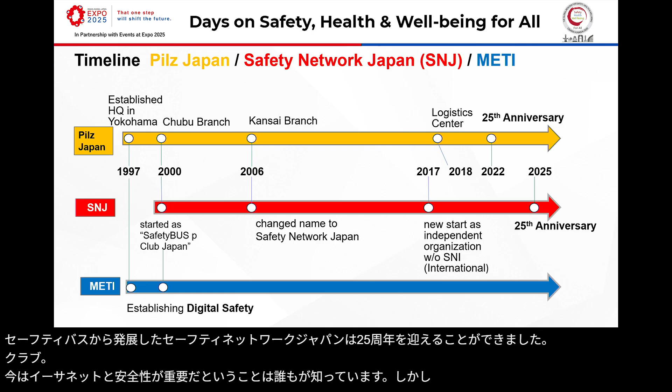Now, safety is at home in every industry. The most interesting industry, however, not so much in Europe but with success here in Japan, is hydrogen as a means of powering vehicles in competition with battery electric vehicles. The promise of hydrogen is that you can use renewable energy sources like solar, wind, or water to store energy, so that when the grid doesn't need the sun that's shining or the wind that's blowing, you can store the electricity.

Rather than shutting off the windmill from the grid, you can then use the storage to either fuel a vehicle or create energy by replacing gas power stations with hydrogen-based power stations, giving your house warmth when it needs it. Right now, we see the industry scaling up, and the key to success of this industry is modularization. For modularization, you do need standardization.

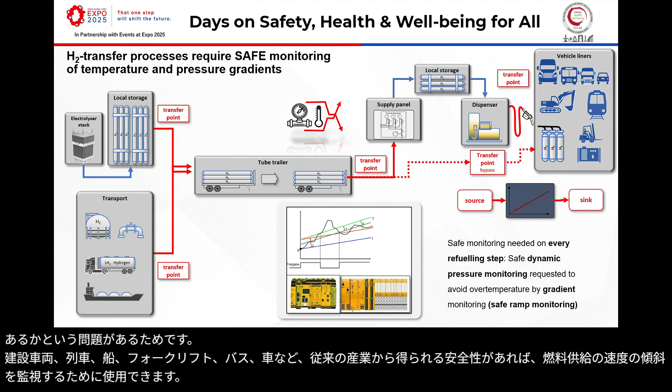For efficiency, you need safety, because the question is how long does a vehicle have to stay at the dispenser when you need to refuel it, whether it's a construction vehicle, a train, a ship, a forklift truck, a bus, or a car. Only with safety that you take from traditional industry, like the ramp of a drive, can you monitor the ramp of the speed of fueling. This way you can shorten the time to have it filled up.

The next challenge is that a trailer is an investment of around €1 million. If you have invested in a trailer, you cannot necessarily expect to have the right connections at the filling station, so sometimes they have to send the trailer away because they cannot connect. Sometimes the driver of the truck doesn't know which panel to connect to. Safety technology can help give safe access so that you don't make a mistake when you pump the hydrogen from the trailer over to the station.

The same technology you can use to provide not only the safety of the process of making hydrogen, you can also securely monitor the access. That is a physical security measure, including a two-factor authorization methodology by which you can have remote maintenance without the danger of pirates trying to capture critical infrastructure.

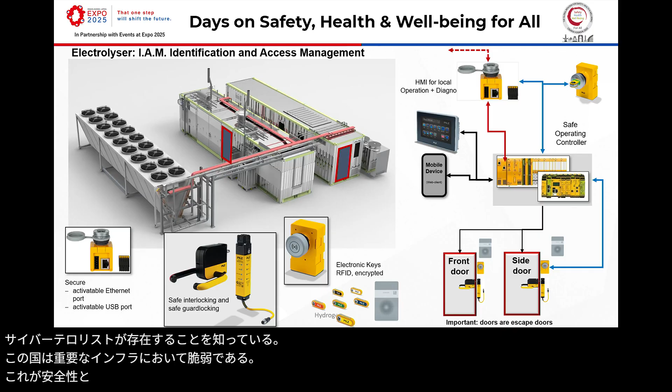Because in the day of the World Wide Web, it was earlier seen as a community of people with well-thinking. Today we know that there are cyber terrorists, and every country is vulnerable in the critical infrastructure. This is why safety and security technology can help protect a country's well-being.

Now, how do you combine the basic needs of safety and security with industry? We feel that it is a good decision that in Japan, well-being is in the center of everything. Well-being while at home, well-being while at work. What does protect well-being for us? It is feeling safe. Now, what makes me happy and safe when I'm at my workplace?

It's the technology. Because if I am in a workplace where the technology allows me to collaborate with a very fast-moving machine without me having to be afraid that I get injured, I feel well.

But safety changes. It used to be very static. You put a robot in a cage, and then there is safety. Today, you want to shake hands, not literally with a robot, but you want to share the workplace. And our esteemed colleagues will present you later how that can be done.

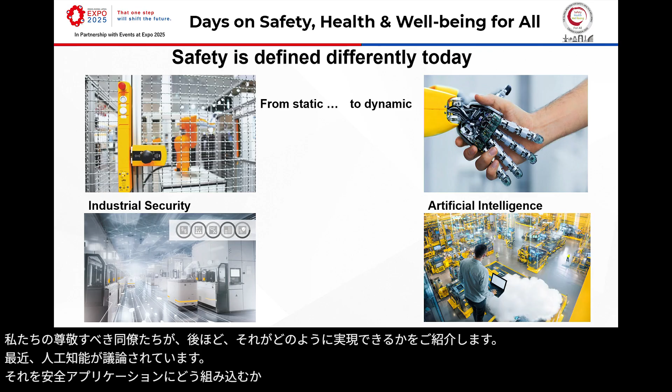Lately, artificial intelligence has a lot been discussed. How can that be included in safety applications, as well as industrial security?

In Europe, the regulators have seen this, as well as the standard writers. We are standing in front of a big change because the machine directive was not law. The associated industrial standards were not law. So nobody could sue a company that was not interested in bringing proper safety in until an accident happened. Then the BG comes and then you're in trouble.

This all changes in 2027. Then by EU regulation, you violate the law if you don't provide a safe and secure workplace, when you don't care for the well-being of your employees. What is regulated now is cyber resilience in the Cyber Resilience Act, the need to protect safety separately so that a cyber criminal cannot take over the safety function of an autonomous machine.

A lot of the scenarios are around autonomous machines going haywire because they have been corrupted by cyber terrorists and they go and run into people, killing people. With proper safety technology, this is a fiction for Hollywood movies, not for reality, because safety makes sure that you come to a safe state. This again means that you need to protect the security, that you can't eliminate safety.

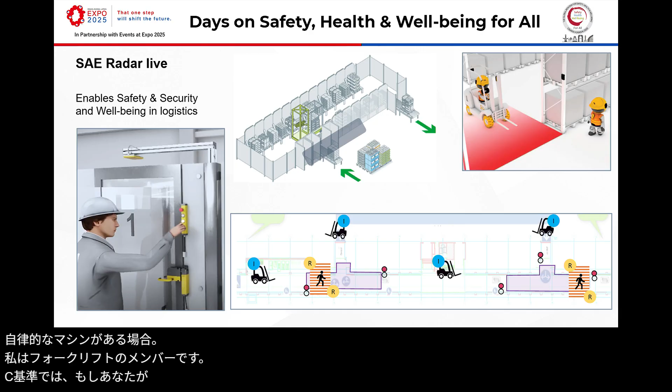Also, you have the ability to regulate access in such an area when you have autonomous machines. I'm a member of the forklift truck standards committee, and there we say if you close off the area where the autonomous forklifts drive, you don't need safety devices on it.

But you need guarding when you enter it. So when you have such a zone, you could use radar technology to count and detect people, or RFID reader technology to inform how many people have put the whole area into maintenance mode, and ensure they close the door behind them, because the safety system cannot be restarted until the last key has been taken out of the electronic lockout tagout pack.

You still have the problem that when you have people in such an area, you want to have productivity. If you can track where the human is, you can allow full speed where the autonomous vehicle is, as long as you know the distance is far enough so that no harm can happen.

This, to me, is especially true in the country of robotics. Whenever I want to follow leading robotics, I read what's happening in Japan. You're definitely the leaders in this technology, and I hope that safety can present continuous well-being at robot applications.

Where security on board ensures that the AGV cannot be hacked, and where conventional safety technologies merge with artificial intelligence and modern ways of collaboration, as will be presented later, enabling us higher productivity with well-being at the center of the collaboration between a robot and a human.

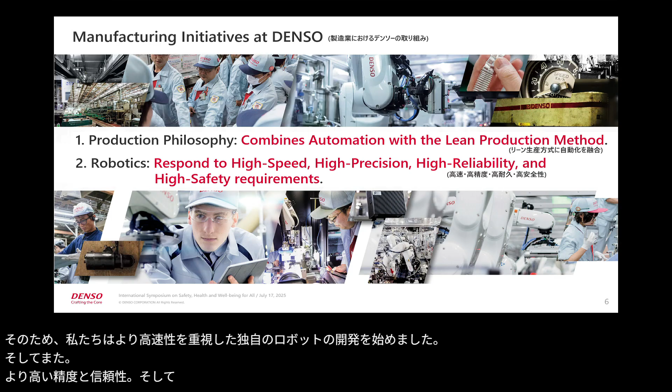To rationalize the current system, in Japanese we say we do Kaizen first, then automate afterward. After rationalizing through Kaizen, we developed the automation, so we can realize a more lean automated process.

After that, of course, continuous improvement is the key to improving productivity. This circular system starts from investigating the system and Kaizen, then automate and Kaizen again. This loop is the most important key in our operation. So this is the lean automation concept.

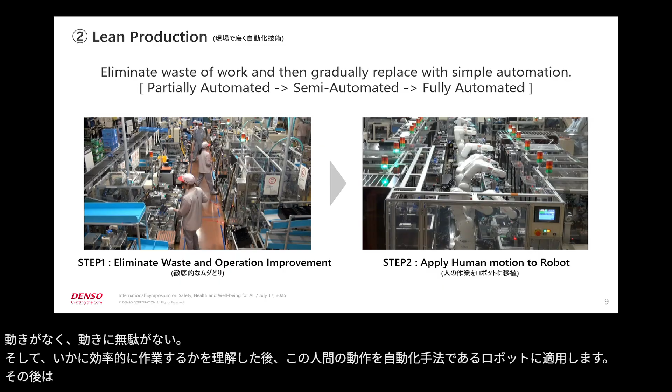So after that, you can see a very high efficiency automation system. After automating, the Kaizen activity is quite important, as I said.

Now we are currently using the IoT system to visualize the muda and the loss of machine operation. But it's not just about finding the waste, we need to attack it immediately at the Gemba side. One team, all together, is one of the key things.

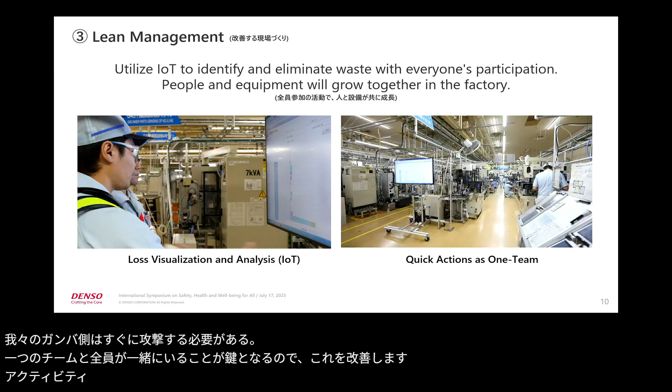In Japanese, this is called 'everyone participates in Kaizen.' This activity is also very important to continuously improve our processes.

Anyway, to realize that system, we have been developing our robot system from the very early stages. Historically, we developed a more high accuracy robot, such as the sealing system you can see here. This was developed in 1988. Before I joined Denso, when I saw this video, I was very impressed.

After that, we developed our business, such as the Denso Wave robot company. Now we are focusing on adding more safety functions to the robot. You can see this is our latest collaborative robot, which can work at very high speed. The key was the actuator controlling system.

I'd like to talk about the future production system. Denso was historically focusing on the area of certainty in production volume and product life cycle. If you developed your component or product, this area would give more cost efficiency. But recently the system needs to respond to more flexible manufacturing, so we need to develop this area also.

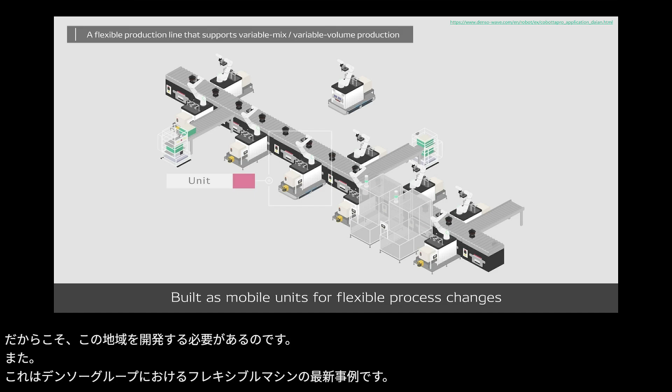This is the latest example, an actual flexible machines example in our Denso group. This is the concept: you can see the conveyor system, transfer system, and each robot module can connect anywhere they want to make a more flexible system. Many collaborative robots can move and join the transfer system, and we can produce many varieties of products—no limitation of the product.

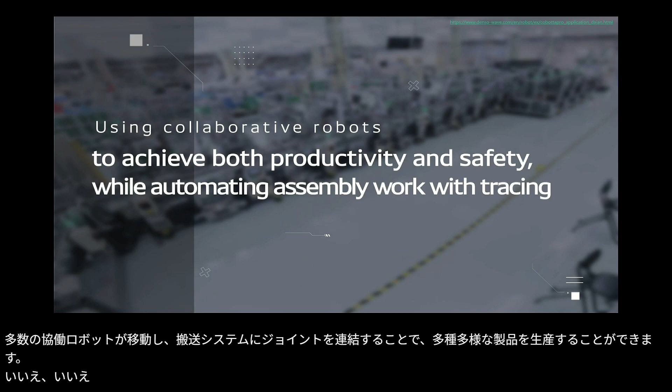To realize this system, safety is key. If maintenance people come to the machine side, the machine will autonomously slow down. We are using this type of sensor system to detect the human. After finishing maintenance, the robot can move faster again. You can see the person here on the left side, and also after finishing maintenance. This is the latest system.

To realize that type of system, the key is risk assessment. This is one example in our company: when you install a collaborative robot, it takes 40, 50, or more hours to complete the risk assessment of the total system. You probably know the ISO standard well—this activity involves determination of the limits of the machinery, hazard identification, risk estimation, and risk evaluation. Such a loop is needed, but this process is very complicated and difficult to do with just a robot engineer.

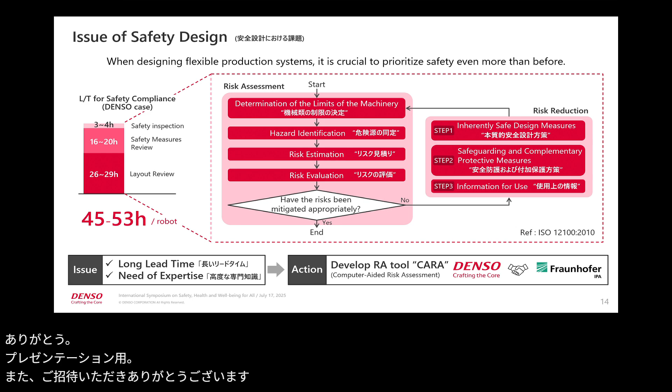Thank you, Yoko-san, for the presentation, and thank you for the invitation. My name is Werner Kraus. I'm with Fraunhofer IPA, in almost the same city as Thomas Pilz in Stuttgart, in the area of Mercedes and Porsche in Germany. At Fraunhofer IPA we've been in robotics since 1973—more than 50 years pushing the automation border. I'm responsible for the automation and robotics division at IPA, with around 70 people working on all kinds of industrial automation. Denso has been a long-term partner of ours for almost 10 years.

We are cooperating especially in the area of robot safety, because it's really an important topic today. What we have learned, and have also seen in the Denso presentation, like the sealing application, is that we have already seen incredible automation solutions in the past, 20 or 30 years ago, automating processes we thought impossible because they were flexible with complex work pieces. Looking at our history, we see we're still doing the same processes—handling tasks, assembly, welding, gluing—so we've said we are now talking about the automation of automation.

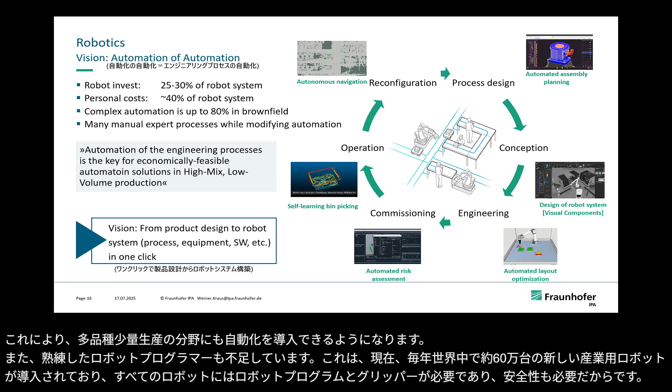So we are now automating all the processes around the robot system—for example, process design, conception of the robot system, engineering, the layout of the robot cell, and especially risk assessment, which is the focus today, but also self-learning bin picking and autonomous navigation. This gives us the possibility to introduce automation in areas with high mix, low volume production, and scarcity of skilled robot programmers. Every year we introduce around 600,000 new industrial robots worldwide, and every robot needs a program, needs a gripper, but also needs to be safe. That's the point where we started with our CARA.

One of the enabling technologies is the so-called matrix production—a production concept derived from Industry 4.0 which allows for personalized products. We have positions in the loop that are completely manual, but also fully automated stations with highly optimized robot solutions. This combination allows us to combine the strengths of humans and robots, together with autonomous mobile robots, which enable the material flow.

We have seen that safety is a really important topic, and it's not just nice to have, it's mandatory, and it's often underestimated from a cost side. Around 10 to 15% of a complete robot system is invested into all the safety-related components and engineering efforts. When we look at the worldwide robot market, it's currently around 17 billion US dollars, that's the industrial robot market.

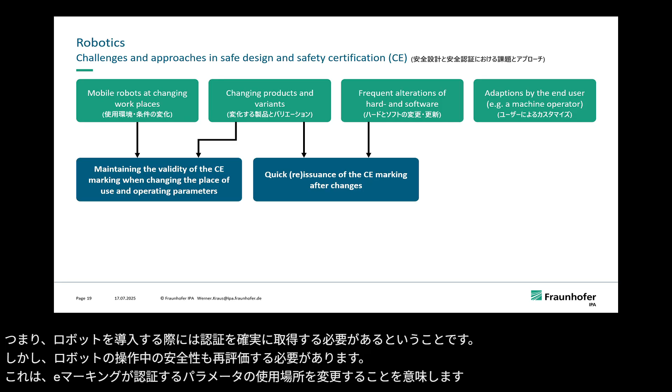This means we have to ensure the CE certification when the robot is deployed, but we also have to re-evaluate the safety during operation of the robot. This means CE marking when we change the place of use or the parameters. We should re-certificate the robot after making changes, for example changing the workpiece.

But then we have to also support the engineers in performing the risk assessment. This means we have to incorporate the safety standards, like using inherent safe design, for example checking the machine borders, but also adapt the safety configuration, for example in the PLC in the end. And then also support the engineer in navigating all these standards and norms which we have to take into account.

This means we have quite a complex task to solve, so to come from a robot or robot system which is doing machine tending quite well without safety to a safe system. This means identifying the hazards, guiding through the risk assessment, and then also implementing these measures in the robot, in the PLC, and also writing the documentation.

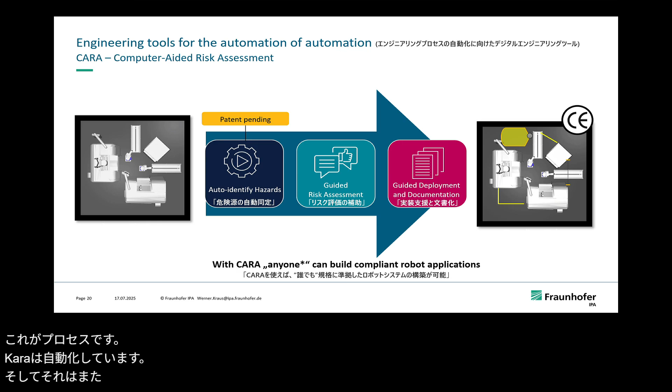That's the process CARA is automating, and that's also the work, the task where Denso and IPA were collaborating in the past years.

There are a couple of engineering tools around this automation of automation when it comes to the safety ecosystem. On the one hand, we have a computer-aided risk assessment, CARA, a software tool. It's like Visual Components, which helps us in...

This means we are identifying the actual hazard which a robot presents by doing such collisions. So we are identifying the forces from the universal robot in several arm positions with different velocities, with different end effector weights, which allows us to build up a database.

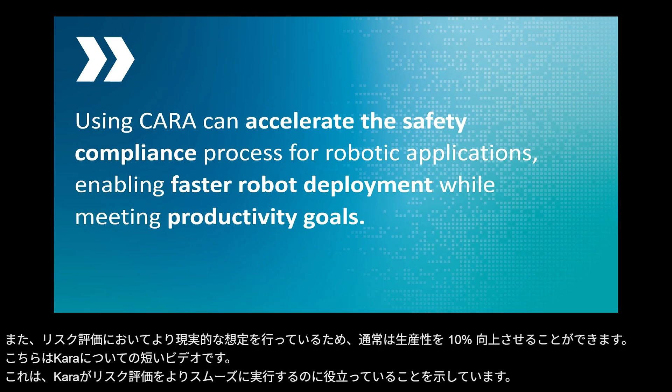Here's a short video about CARA, which shows how CARA helps us run more smoothly through the risk assessment using this digital twin technology.

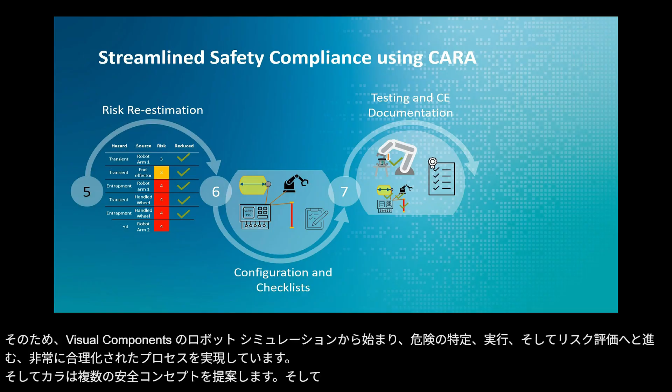So we have a really streamlined process, starting from a robot simulation, for example from Visual Components, then going into hazard identification, followed by risk estimation, and then CARA proposes multiple safety concepts. Then the risk is re-estimated. We check the configuration, do testing, CE documentation, and by following these steps we have the safe robot system.

This reduces engineering efforts, and together with Denso we have seen that we can reduce the effort by more than 50%. This means we need only half of the engineering hours using CARA to have a safe robot system, and that's a really good leverage.

To give you some background, we started the collaboration almost 10 years ago, in 2015, with the goal to reduce safety costs by 60%, especially when it comes to collaborative robots, fenceless robots like cobots. In 2019, we had a first concept and a prototype running.

You see here that it was also part of the development that it becomes easy. So we have the vision that you start with a robot system, press one button, and make it safe. Then CARA investigates all hazards, checks where the risk is, how to mitigate it, and where to place, for example, a laser scanner or a fence, and which kind of safety technologies to use.

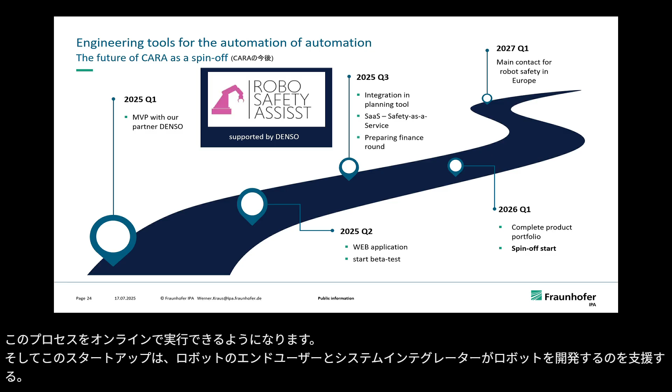Maybe one last insight into safety. In Europe, as we've already heard from Thomas Pilz, safety is now a law, but also the AI Act, for example when it comes to artificial intelligence. We have also created an experimentation area where we explore safety and AI in the area of robotics. The AI Act is basically applicable to all AI systems, so it could be a chatbot, an autonomous car, a bin picking solution, but especially also an AI safety sensor.

And the machine regulation applies to all machines, so it could be a robot or a CNC machine. Now the question is how do we put these things together? When we have a system, the question is whether the AI system is part of the machine. If it's not a machine, only the AI Act applies.

If AI is in the machine, the question is whether AI is a function, for example bin picking, or a safety function. When it's only a function, we only need to look at the AI Act. So when using AI in computer vision to detect workpieces, it's sufficient to look into the AI Act and requirements for software, which brings us to cybersecurity, mentioned earlier.

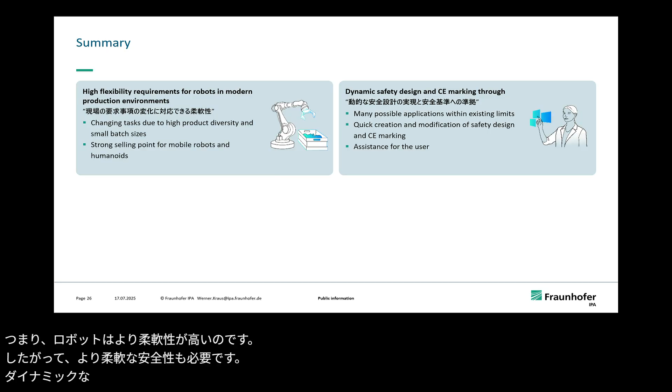Short summary: in the last decades robots have become more flexible. We have bin picking skills, assembly skills, and they've become mobile. So robots are more flexible, and therefore we need more flexible safety. We need dynamic safety design to make these flexible robots safe. We've seen that engineering tools like CARA have high potential to support engineers performing risk assessment, reducing efforts by 50% and making deployment much faster.

From the vision point of view, the combination of safety and AI down the road is quite challenging, but we are building up competences here. Now I would like to hand over again.

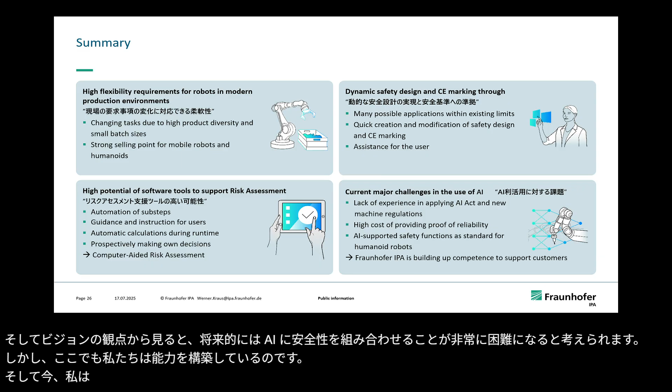Thank you, Dr. Kraus. Let me wrap up our key message again. First, manufacturing is revolutionizing over the next generation, becoming flexible for volume and variant and reconfigurable. This is a kind of matrix production system. Safety will be more important for human-machine collaboration. The key will be using more digital technology to implement this. To think about the future of zero accidents, we may need to collaborate more with Japan, Germany, or other countries to realize and work toward that goal. Thank you for your attention.

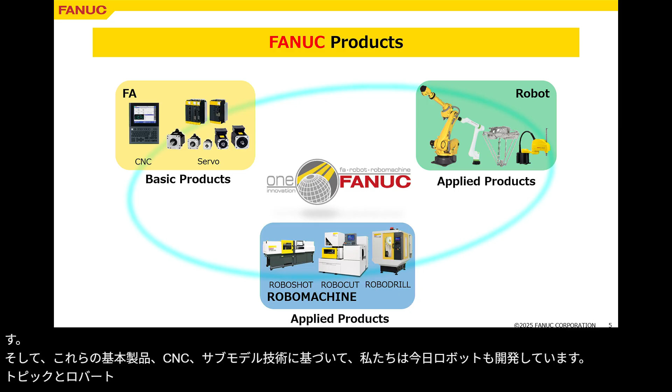We at FANUC have three key major products for factory automation: FA, robot, and robo machine. FA is our basic product, including CNC and servo motor technologies, mainly used for many machine tools all over the world. Based on these basic products, CNC and servo motor technology, we also have robots and robo machines, such as small machining centers or electric injection molding machines.

We manufacture all our products, FA, robot, and robo machine, in our own factory only in Japan. By using a lot of our own manufactured industrial robots, highly automated manufacturing in our own factory produces not only higher productivity and cost reduction, but also higher quality and higher reliability with no or less unstable manual operation.

From now on, the topic is safe and secure collaborative robots. We are now facing a lot of challenges in the manufacturing field, such as securing labor, how to transfer skill from experts, cost reduction, how to respond to variable mix and variable volume production, and of course energy saving and carbon neutrality, which is becoming more and more important.

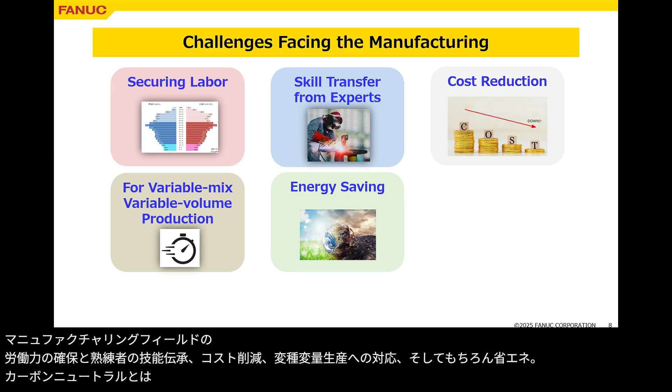So to solve these problems, collaborative robots are indispensable from the viewpoint of automation that is flexible, simple, and reduces system cost.

Again, what is a collaborative robot? A collaborative robot can work together with human operators with no safety fences. Conventional industrial robots have faster speed or larger payload, and so are dangerous. That's why safety fences shall be installed between robot and human operators.

So combined manufacturing styles can be available, such as robot to human. And of course, collaborative operation is also available. For example, while a collaborative robot holds some heavy parts, the human operator can concentrate on executing some complicated assembly operation.

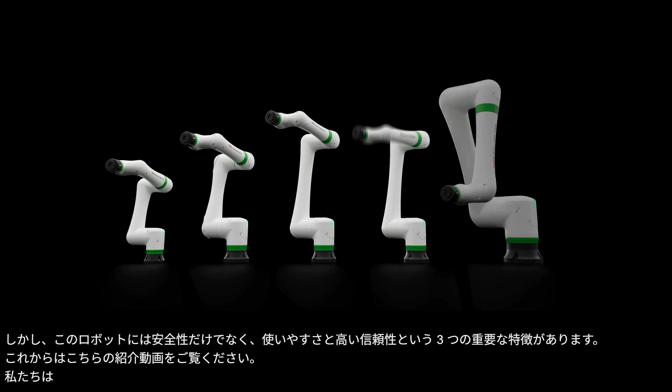Okay, from now on, please see this introduction video. CRX robot has been installed for various applications. Of course, this robot has a good safety function like this contact stop function, so it's safe and easy to operate by direct teaching, manual guided teach, and furthermore, easy to make a program by dragging and dropping icons on the tablet pendant.

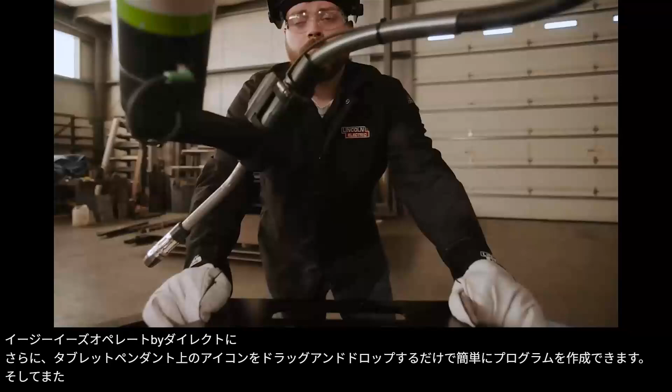Again, CRX robots have been installed for various applications such as arc welding. CRX on the handcart is very useful, and a mobile platform is available. Power input, standard 100 or 120 volt input available, so easy to install.

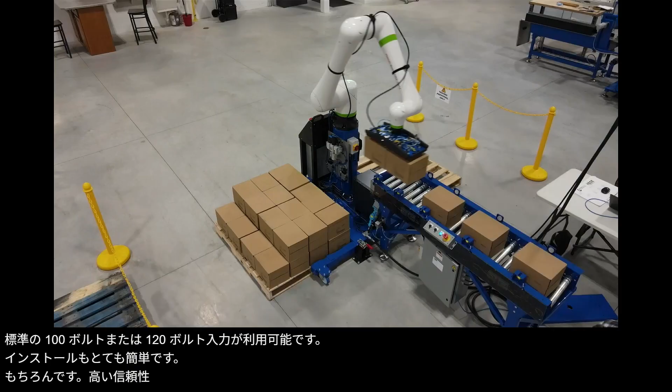Of course, high reliability, more than 8 years, no change of robot parts, maintenance free. So it's available for various applications: logistics, painting, and machine tending. We have a lot of collaborative robot lineup as shown, from a payload of 5 kg to a maximum of 30 kg.

From now on, I want to show just one detailed application for easy installation with a handcart. CRX collaborative robot is so lightweight, that's why it can be used on an AGV or a handcart. So it's very easy to install when and where a customer needs it.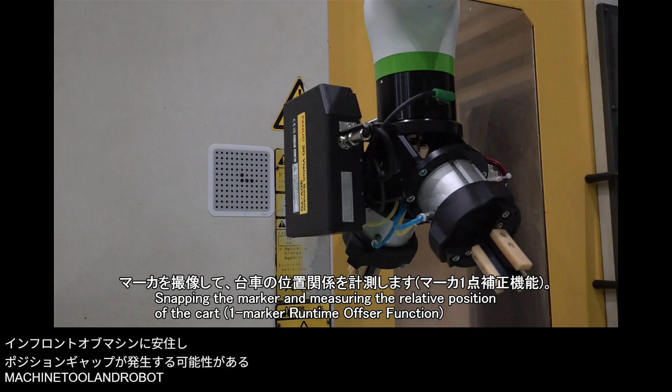This application shows machine tending. First, CRX on the handcart is set roughly in front of the machine tool. As you can imagine, at this moment some position gap might occur between the machine tool and the robot. So by using our own vision system, the robot can compensate for the position error, and work so precisely.

From now on, after picking up machining parts, and opening the manual door like a human being, finally the robot installs the workpiece into the machine tool.

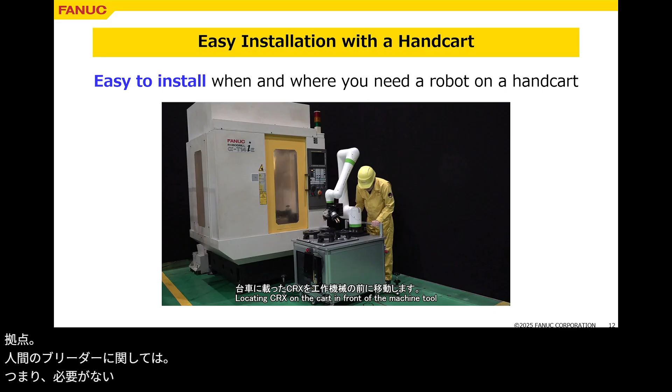As you see in this video, a collaborated robot can be installed without any safety fences, and the robot can perform the same operations as a human operator, such as pushing buttons or opening and closing the manual door. So collaborated robots can easily be installed on the manual side, using the same peripheral devices as human operators. That means no need for change for robot installation, so that's why it's very easy to install.

Final slide: safety and well-being with collaborated robot. Here is a comparison between human operators and conventional industrial robots. On the left side, in case of human operation, some hazardous tasks such as heavy parts handling or operation in hazardous, severe, dusty, or chemical environments might result in the risk of industrial accidents. On the other hand, on the right side, in case of conventional industrial robots, of course they are very useful and helpful for automation.

However, conventional robots need safety fences, so customers need to invest some cost, space, or time to install them.

On the other hand, in case of collaborated robots, as I mentioned, without any safety fences, the robot can be easily installed on the manual side. So hazardous tasks such as heavy parts handling can be easily automated, resulting in zero industrial accidents. That's why safety and well-being can be realized by using collaborative robots.

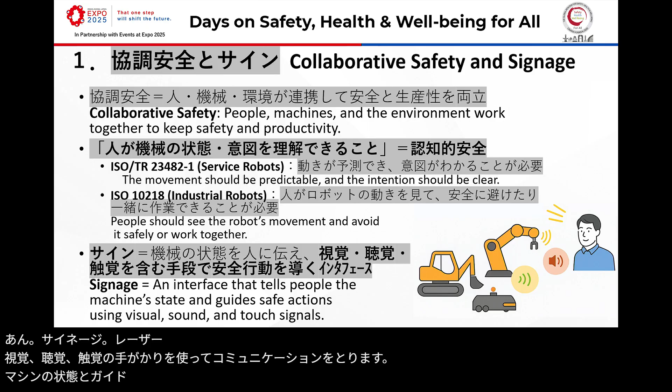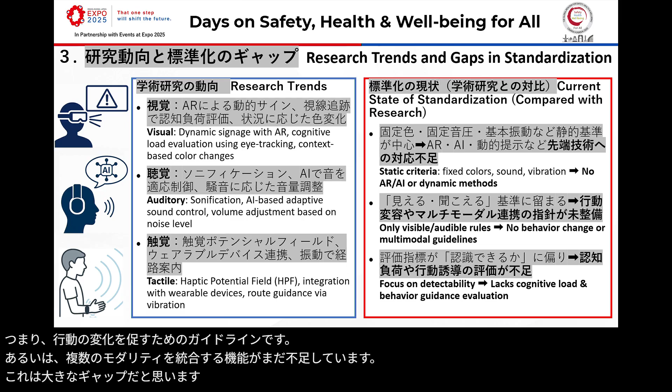So last year we conducted an experimental study. We tested the effects of combining light and sound. In a setup environment, workers performed assembly tasks while reacting to the signals. The combination of light and sound was easier to notice and caused fewer mistakes than light alone. Some combinations of light and sound were especially well accepted as they were noticeable. This shows signage can not only show information, but also actively guide human actions.

Number five: future direction of standardization. Future standards need to include advanced technologies, like AR and AI, which can provide adaptive and dynamic signage depending on the situation. We also need better evaluation methods, like eye tracking or physiological measurements, to consider human workload and reaction speed. And we need to organize how to combine modalities like visual, auditory, and tactile signals, depending on different work environments.

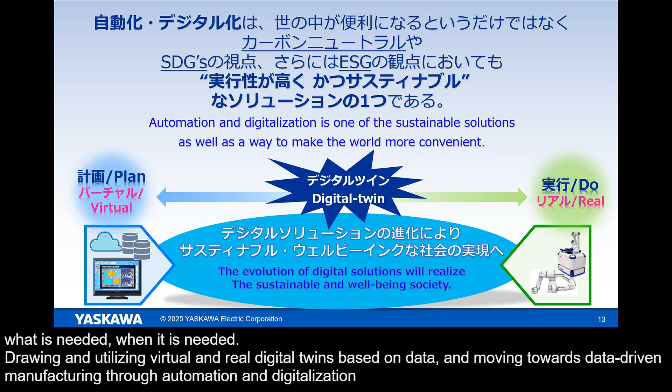Thank you very much, Takashi Nishimura. It's a very important technology for the platform to achieve collaborative safety using collaborative robot systems. Thank you very much.

And thank you very much. Thank you for the celebration from FANUC to Yaskawa.

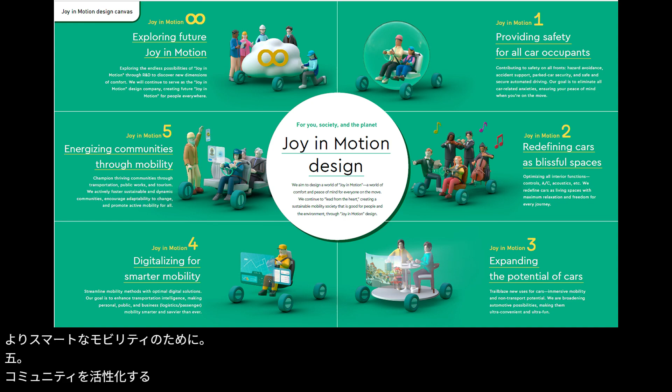Regarding Joy in Motion Design, we are working on 6 initiatives: 1, providing safety for all car occupants; 2, redefining cars as blissful spaces; 3, expanding the potential of cars; 4, digitalizing for smarter mobility; 5, energizing communities through mobility; 6, exploring future Joy in Motion.

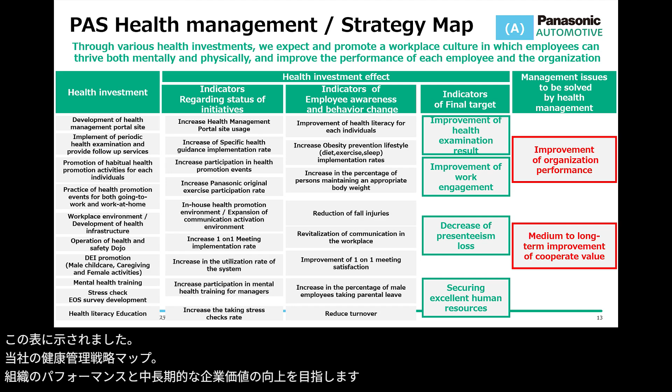Regarding health management, this table shows our health management strategy map. We aim to improve our organizational performance and medium to long-term corporate value through various health initiatives and investments.

From the next page, I will introduce collaborative safety initiatives. First, our current status and direction at the manufacturing site.

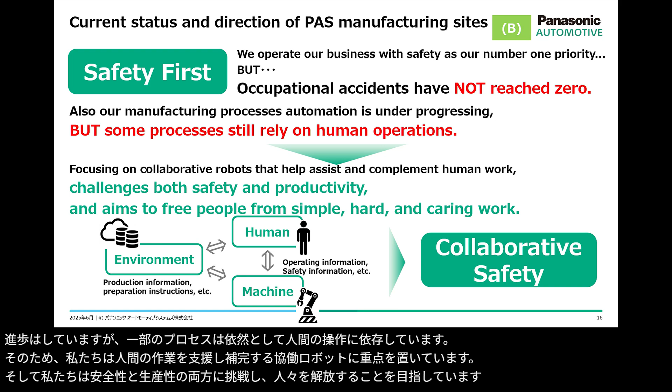We operate our businesses with safety as our number one priority, but occupational accidents have not reached zero. Also, our manufacturing process automation is progressing, but some processes still rely on human operations. So we are focusing on collaborative robots that help assist and complement human work.

However, there are challenges in implementing these initiatives. First, psychological stress. When a machine moves close to operators, even if they know it will stop, it scares them psychologically and stresses them out. It means operators cannot feel safe.

Second, safety distance. In many cases, it is difficult to ensure an appropriate safety distance, so we are forced to operate covered by a safety fence. Third, rules, especially risk assessment. Our risk assessment and other rules in operation at the manufacturing site are structured on machine safety by isolation basis.

Last one is cost effectiveness. We cannot spend too much money, so we need to think in terms of cost effectiveness and overall optimization.

So to resolve these issues, we focus on people once again. For example, what kind of information is needed for people to recognize danger? How can we make the unconscious conscious? When do people do dangerous work?

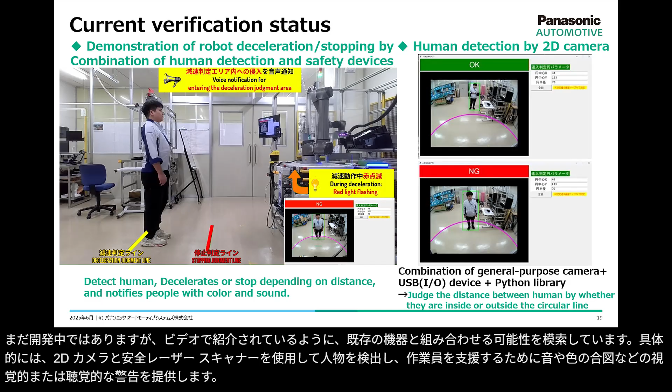We would like to contribute to the realization of a better life for each individual and the well-being of workers through our products, by building and constantly improving Gemba, where valuable workers can work cheerfully, energetically, and vigorously. Thank you for your attention.

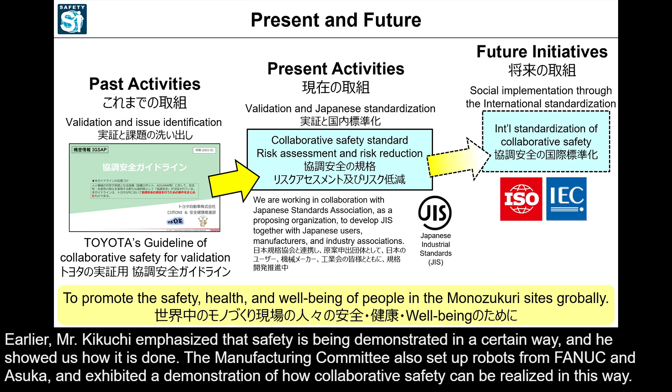Such exhibition presented not only the sequential collaboration, but moreover the responsive collaboration in real time between humans and robots. So please go down to the first floor exhibition areas. Pilz and Fraunhofer have a special corner in the exhibition, so please go to the exhibition areas. So all speakers have finished.